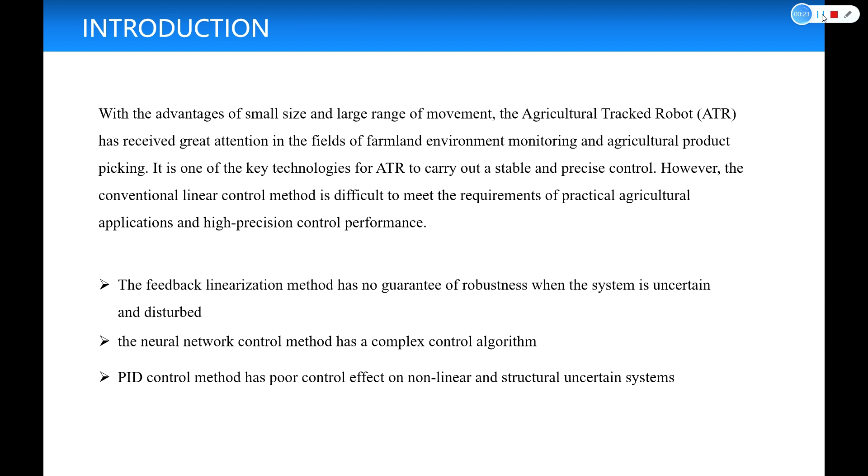The feedback linearization method has no guarantee of robustness when the system is uncertain and disturbed. The neural network control method has a complex control algorithm. PID control method has a poor control effect on nonlinear and structure uncertain systems. Our work can be summarized as follows.

In this paper, an adaptive integral sliding mode switching function with variable tilt parameters was constructed from the perspective of control strategy, based on which an adaptive sliding mode tracking control, composed of equivalent control and switching control, was proposed, which could feed back the speed and pose error of the robot to the variable structure control, and then the kinematics relationship was used to decompose the expected speed of the driving wheel.

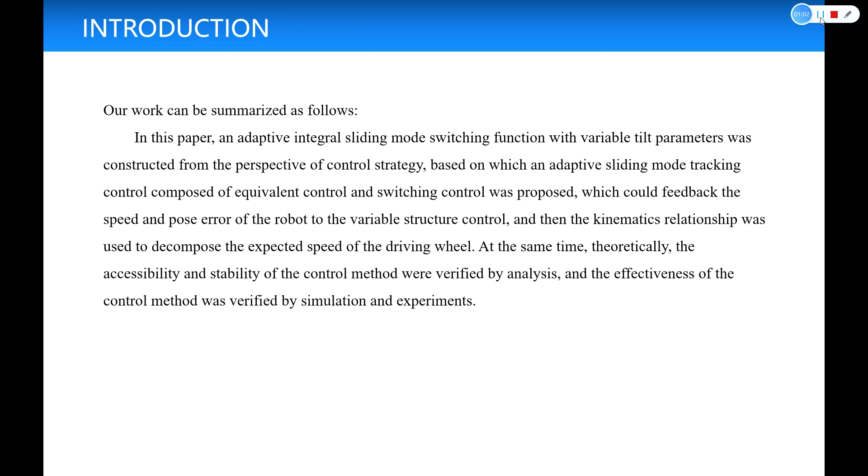At the same time, theoretically, the accessibility and stability of the control method were verified by analysis, and the effectiveness of the control method was verified by simulation and experiments. Secondly, I will describe the modeling.

1. Pose error model for trajectory tracking. Figure 1 shows the top view of the ATR's geometric structure and the schematic diagram of the coordinate system definition. According to Figure 1, the kinematics model of the crawler robot is given by equation 1. The actual pose of ATR is P = (x, y, theta), and the expected pose is PR = (xr, yr, theta r). The pose error of ATR is shown in Figure 2.

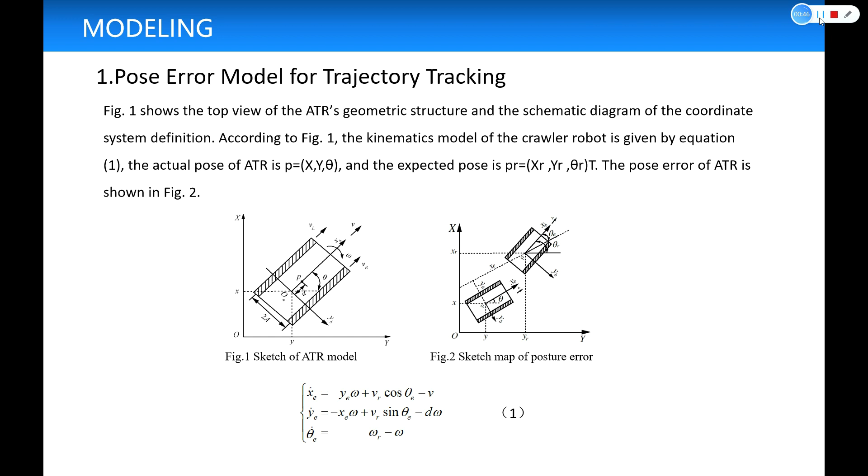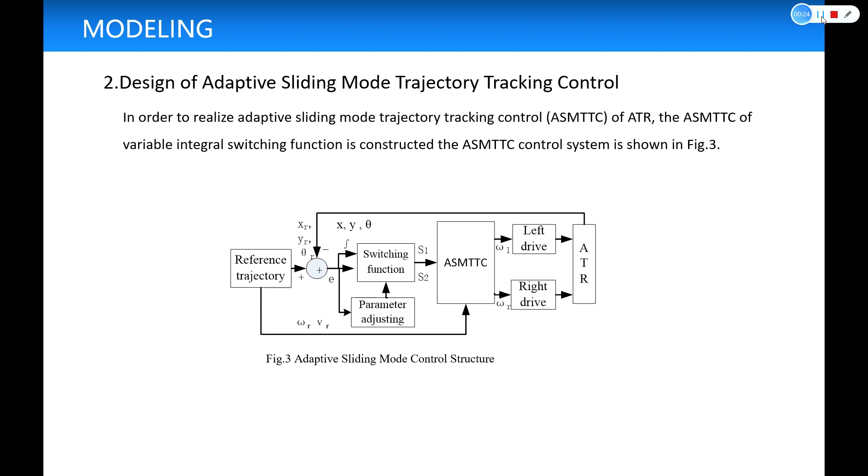2. Design of adaptive sliding mode trajectory tracking control. In order to realize the adaptive sliding mode trajectory tracking control of ATR, the ASMTTC of variable integral switching function is constructed. The ASMTTC control system is shown in Figure 3. A. Design of switching function. The sliding mode switching function 2, based on the variable tilt parameters, is designed according to the characteristics of the differential equation 1 of pose error.

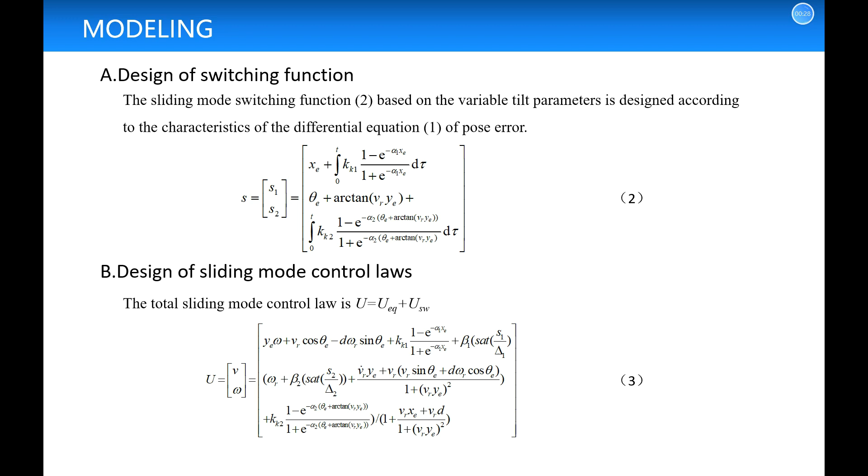B. Design of sliding mode control laws. The total sliding mode control law is U = Ueq + Usw. C. Stability analysis. The accessibility of the boundary layer and the stability of the system equilibrium point in the boundary layer are analyzed to prove that ASMTTC can control robot tracking trajectory to converge to the equilibrium point. That is, the tracking pose error tends to zero.

Theorem 1. Considering the system equation 1, construct the switching function according to equation 2. If the sliding mode control law shown in equation 3 is adopted, the system described in equation 1 will reach the sliding mode boundary in a limited time. Theorem 2. If the system described by equation 1 reaches the sliding mode boundary in a limited time, construct the switching function according to equation 3, where dt is a bounded disturbance.

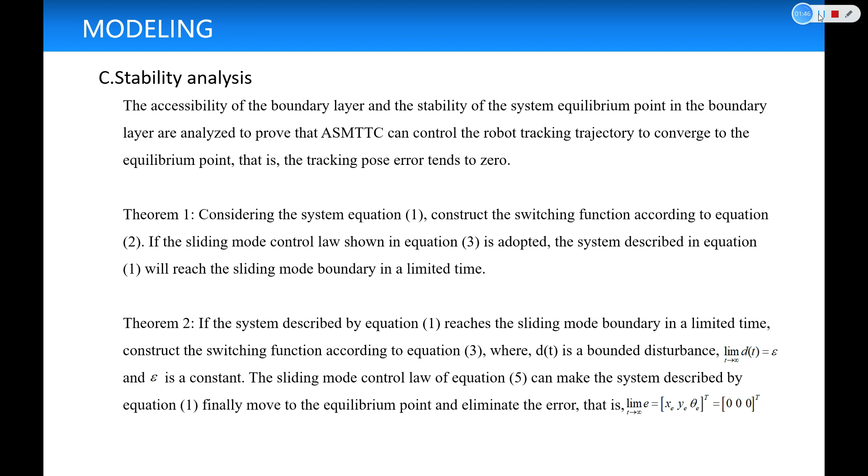Limit dt equals epsilon, and epsilon is a constant. The sliding mode control law of equation 5 can make the system described by equation 1 finally move to the equilibrium point and eliminate the error. That is, limited e equal xe, ye, theta e, t equal 0, 0, 0, t.

Drive control. According to equation 3, when a velocity vd, wd, t is input in the kinematics model, the corresponding angular velocities of the left and right driving wheels are WLD, WRD.

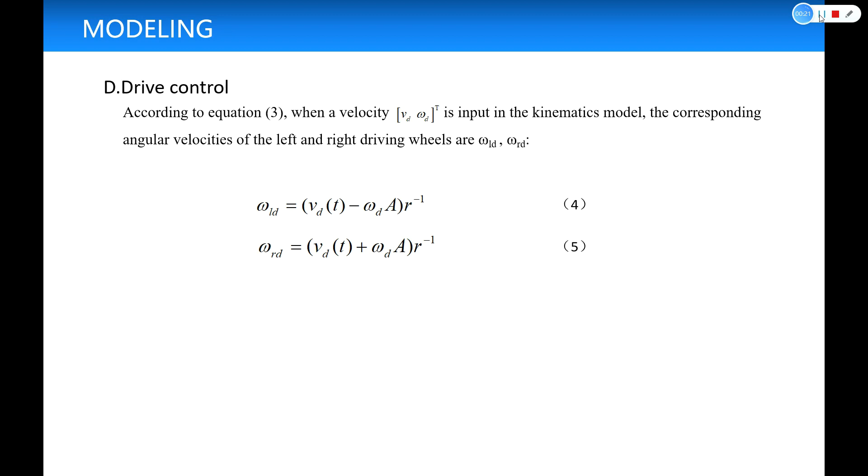And then I will describe the experiments. In order to test the effectiveness of the designed control algorithm, MATLAB was used to construct the simulation model to carry out simulation analysis to the ATR control system. Analysis of step signal response characteristics based on ASMTTC and SMC.

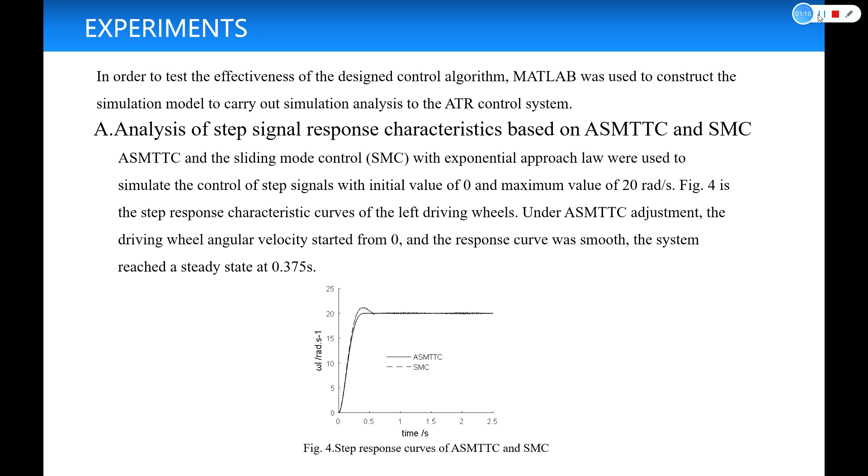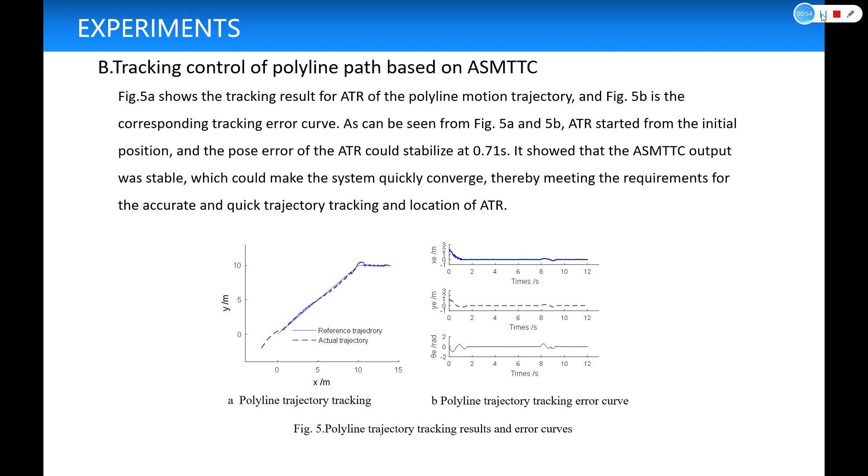B. Tracking control of polyline paths based on ASMTTC. Figure 5a shows the tracking result for ATR of the polyline motion trajectory, and Figure 5b is the corresponding tracking error curve. As can be seen from Figure 5a and 5b, ATR started from the initial position, and the pose error of the ATR could stabilize at 0.71 seconds. It showed that the ASMTTC output was stable, which could make the system quickly converge, thereby meeting the requirements for the accurate and quick trajectory tracking and location of ATR.

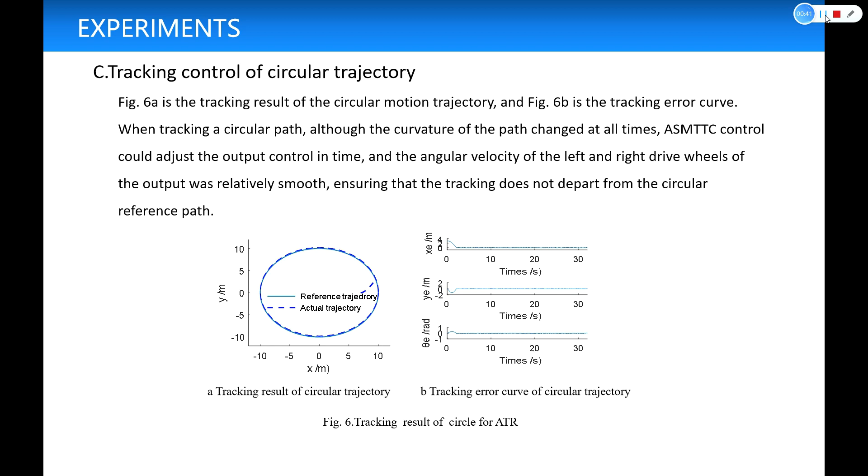C. Tracking control of circular trajectory. Figure 6a is the tracking result of the circular motion trajectory, and Figure 6b is the tracking error curve. When tracking a circular path, although the curvature of the path changed at all times, ASMTTC control could adjust the output control in time, and the angular velocity of the left and right drive wheels of the output was relatively smooth, ensuring that the tracking does not depart from the circular reference path.

Reality experiment. In order to verify the correctness and effectiveness of ASMTTC, a control system based on S3C2440 is constructed, and the independently developed ATR is used as a control object to conduct field control experiments. The control system is mainly to collect IMU information and regulate ATR. The structure of the controller is shown in Figure 7, and the ATR is as shown in Figure 8.

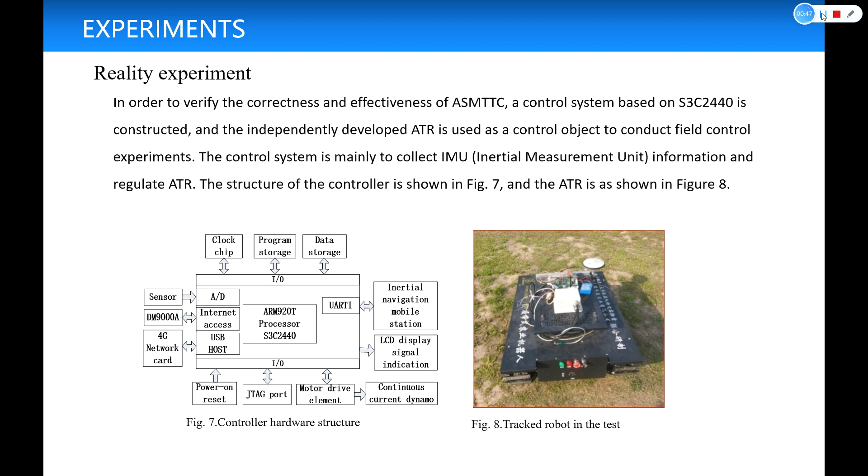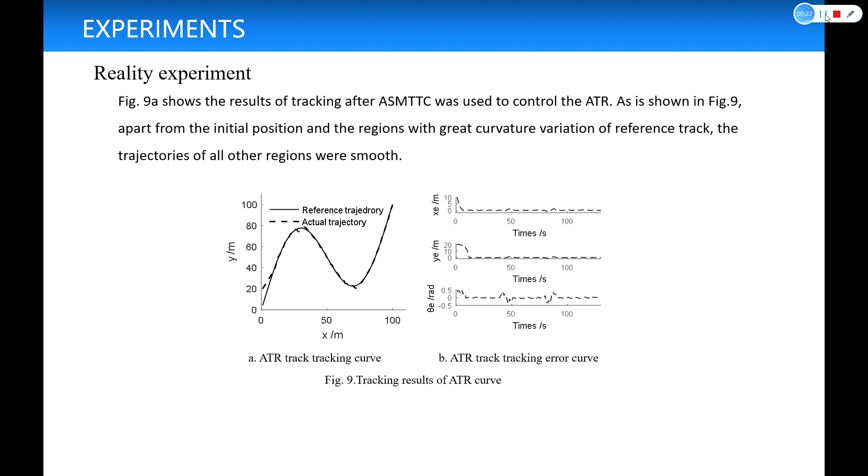Figure 9a shows the results of tracking after ASMTTC was used to control the ATR, as is shown in Figure 9. Apart from the initial position and the regions with greater curvature variation of reference track, the trajectories of all other regions were smooth. Table 1 shows the error generated when tracking the same trajectory under the same test conditions at different operation speed. As can be seen, when using a combination of curved and straight path as the reference trajectory, the use of ASMTTC to control ATR had better stability and control accuracy.

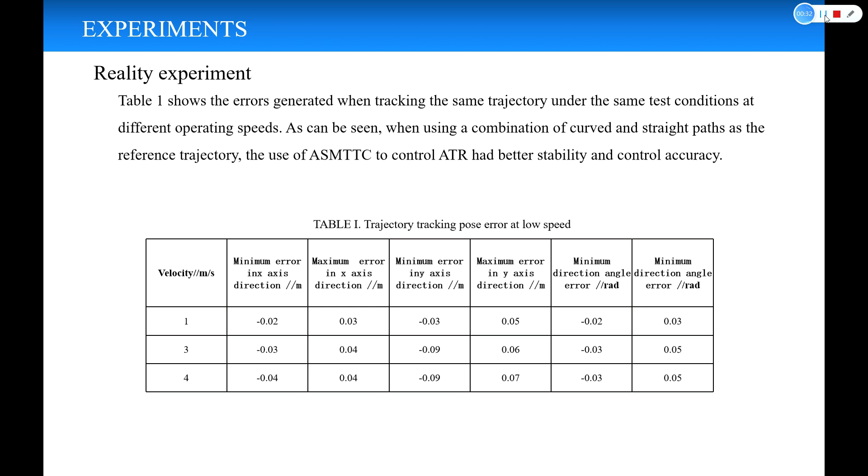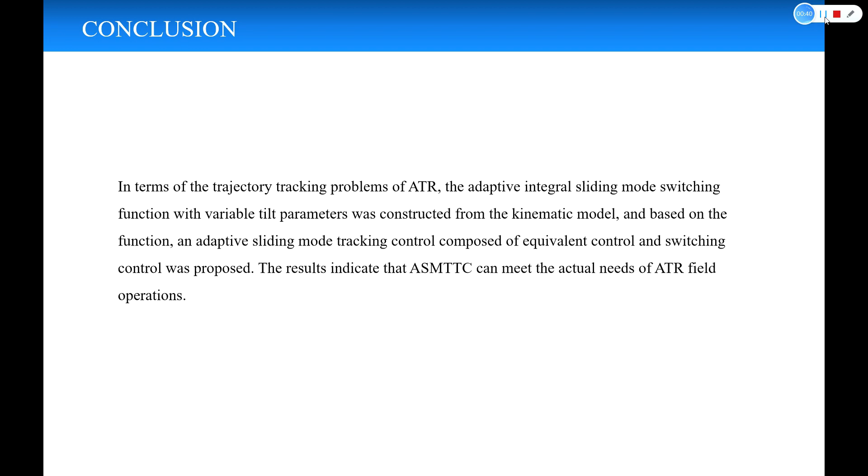Finally, I would like to make a conclusion with this presentation. In terms of the trajectory tracking problems of ATR, the adaptive integral sliding mode switching function with variable tilt parameters was constructed from the kinematics model, and based on the function, an adaptive sliding mode tracking control composed of equivalent control and switching control was proposed. The results indicate that ASMTTC can meet the actual needs of ATR field operations.